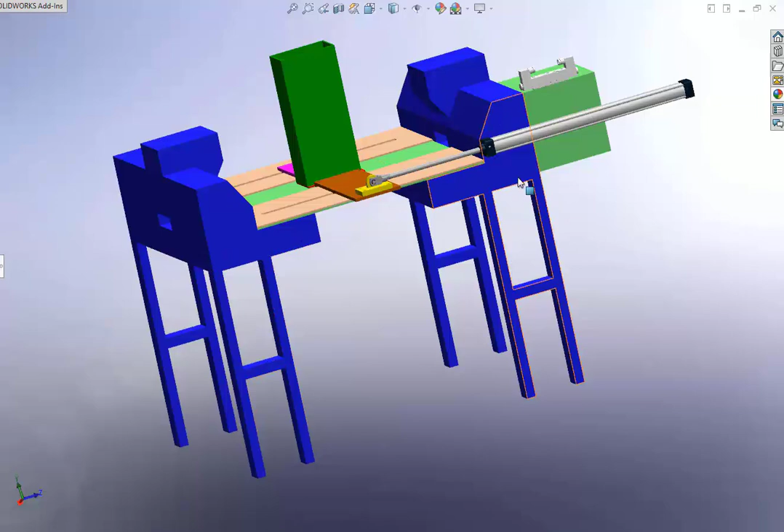Okay, this is a demonstration of a conceptual design for two ultrasonic welding devices which are used to weld the elastic band to the mask.

So here is a pneumatic cylinder and one pneumatic valve, and here we have a mid plate in green in the middle and two guiding plates on both sides. So using the cylinder that...

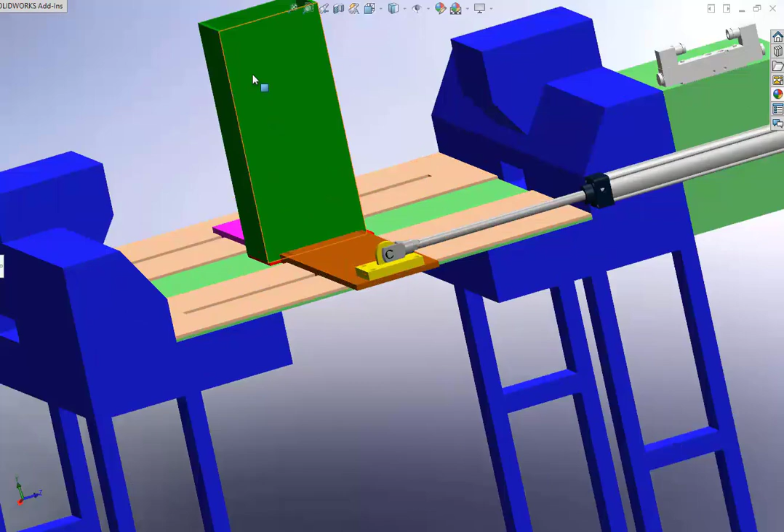This is the cartridge which is holding a number of masks stacked vertically, and the lower plate can slide back and forth to bring the mask under the welding position number 1 and 2 at the left and right.

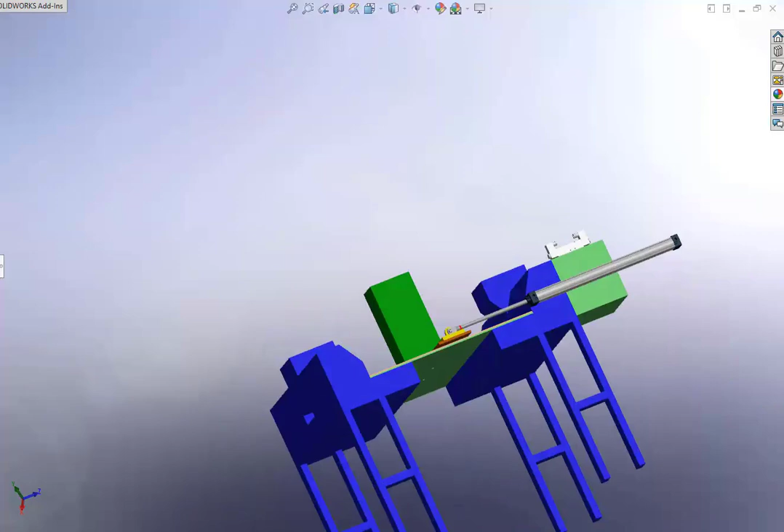So at the bottom we have two orifices. These are where the pneumatic suction comes in, and here that unit, the sliding one, driven by the pneumatic cylinder, goes back and forth, and each time it is taking one mask from the cartridge, bringing that under the welding position, doing the welding at the left and right.

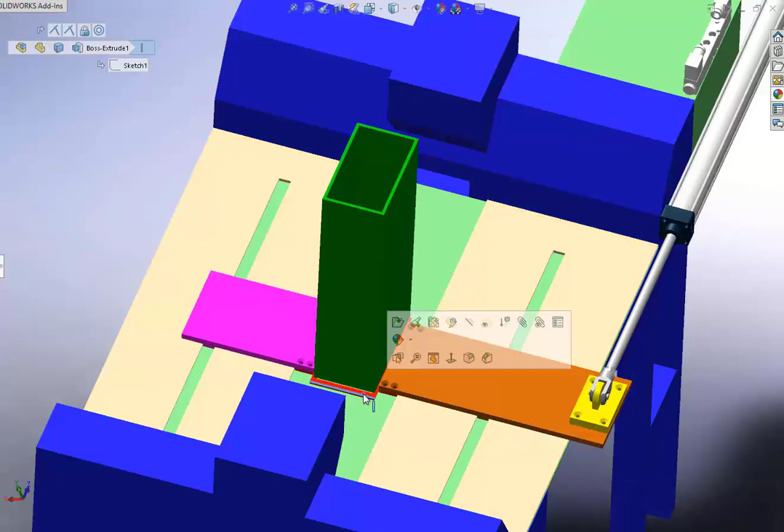So let me show you the operation of the vacuum system. So here we have a manifold system. The vacuum enters at the two circular holes, which can be seen better with the wire frame. That is where the suction comes in, and then it is distributed through this manifold inside the mask area.

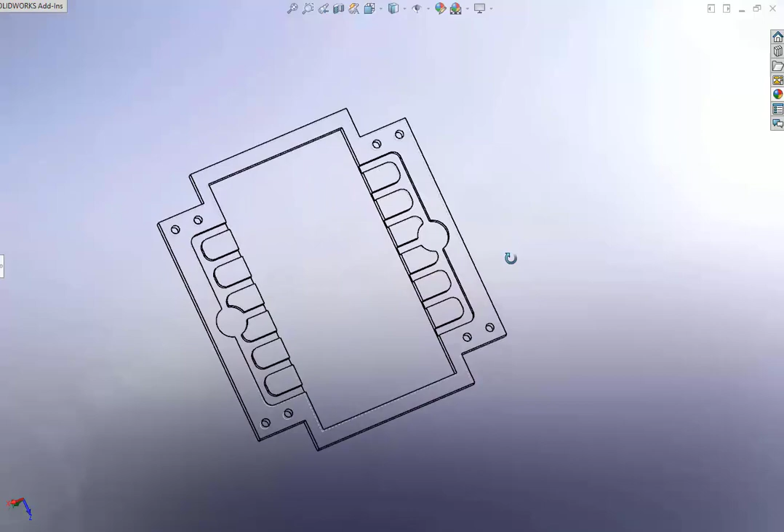So this is airtighted with some elastic gasket to make sure that unless the slide is at the exact position, the vacuum is not enough to pull a mask from the cartridge. So exactly on a spot.

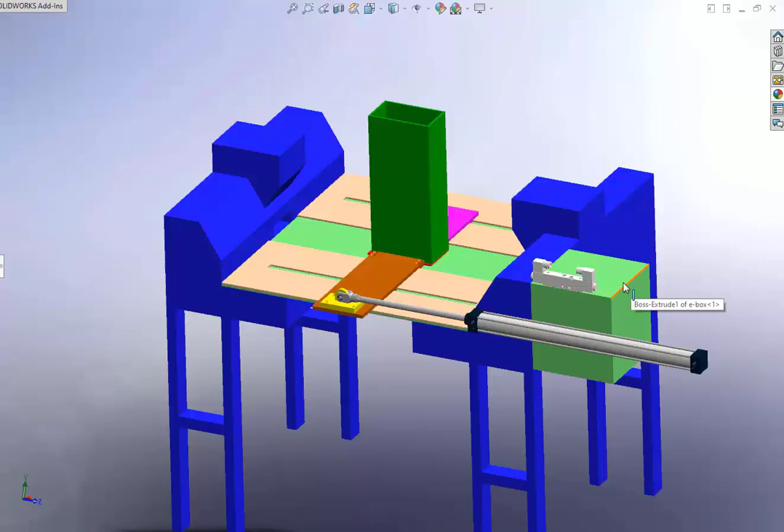So anyway, everything is controlled by this green electronic box, micro switches, controllers, everything is being processed over here, and the operations are by that pneumatic cylinder which has a yoke and is driving the plates to left and right.

So here the opening of that manifold is designed just to bring the mask at the right position for the welding. Only the tip can enter that welding window.

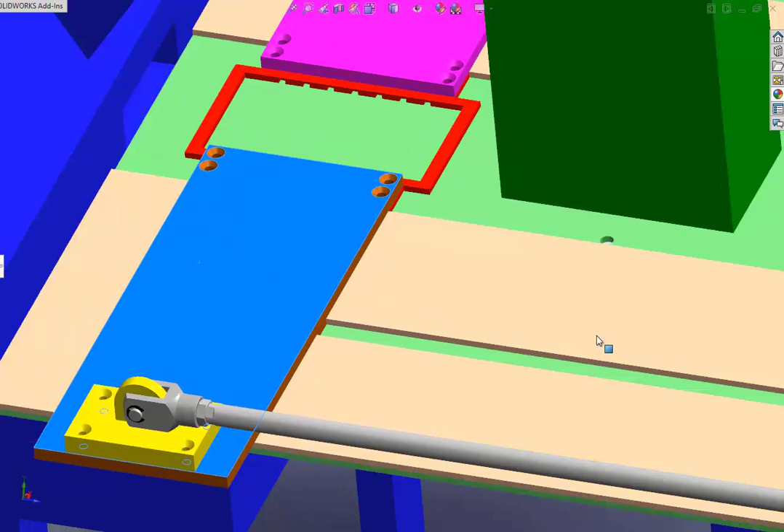So this is the welding of the left hand side. Elastic band is ultrasonically welded, and once it comes back to the other extreme position, now we have the other side, the elastic band is welded, and now we have somehow taking that mask away.

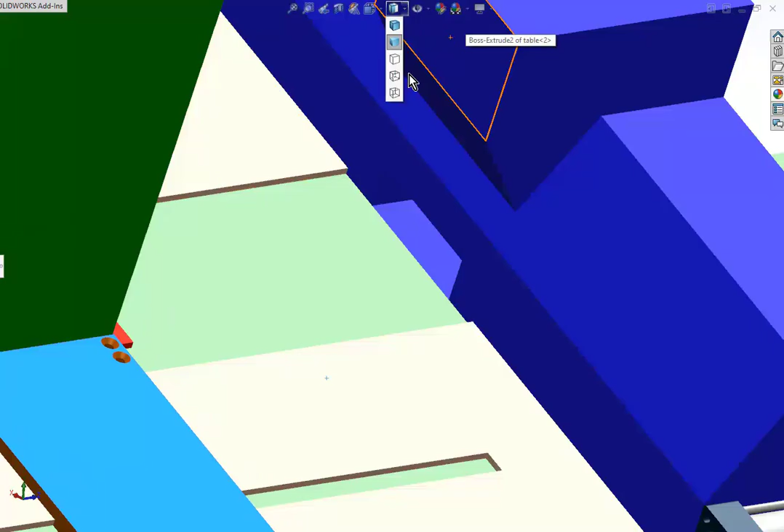So this is the time for the guide system to go underneath the cartridge exactly on the right spot, and then the next mask is being pulled by suction to the position such that it can be brought under the welding position.

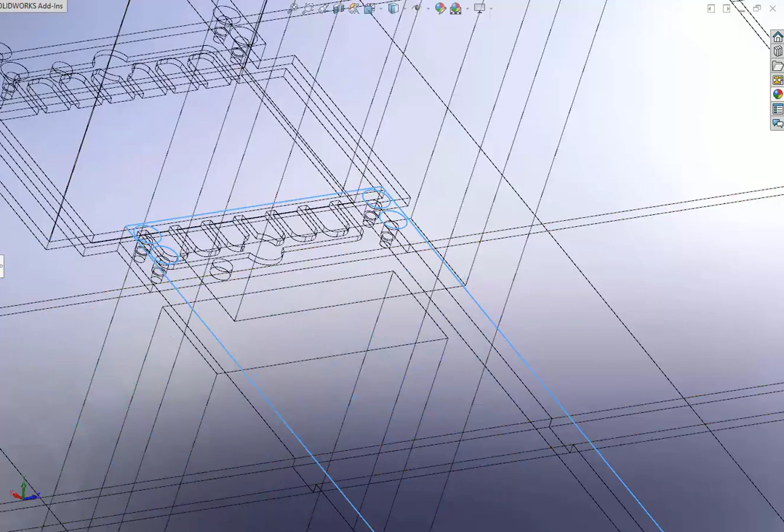So of course this is just a conceptual design. Once you are happy with the basics of the concepts, if you want something to be changed, we can do it easily at this stage, but we can add all the detail and make this operational. So that conceptual design is good enough for discussing the options that we have.

So yeah, this is just the first version with two units opposite to each other.